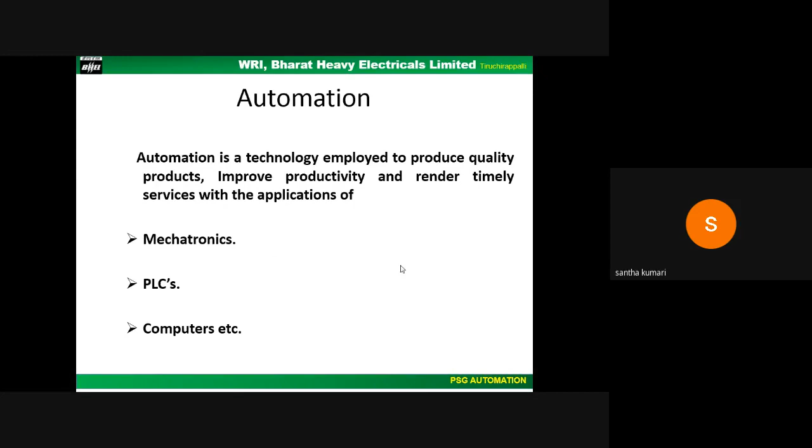My view about automation is that it is technology employed to produce quality products, improve productivity, and render timely services, with applications of mechatronics, PLCs, computers, including robots. This could be my view of automation's definition.

It's not possible to fully automate all functions every time, and complete automation is also not required for many production jobs. In such cases, we can choose automation stage-wise, by introducing simple automatic devices in an existing plant to save labor, increase input-output, reduce physical effort of the operator, achieve better quality of product, and ensure better productivity and profitability.

So here is an example. Am I audible, ma'am? Yes sir, yes, audible ma'am. Sometimes we have network issues, that's what I just checked. Okay, if so, see this image—if manual loading process is used, it's an example just to load, to deliver a box from one place to another.

If a manual loading process is employed to move a component or box, it may seem to be a laborious job. It needs more operators to do the job as depicted in the picture, and sometimes it also leads to operator fatigue.

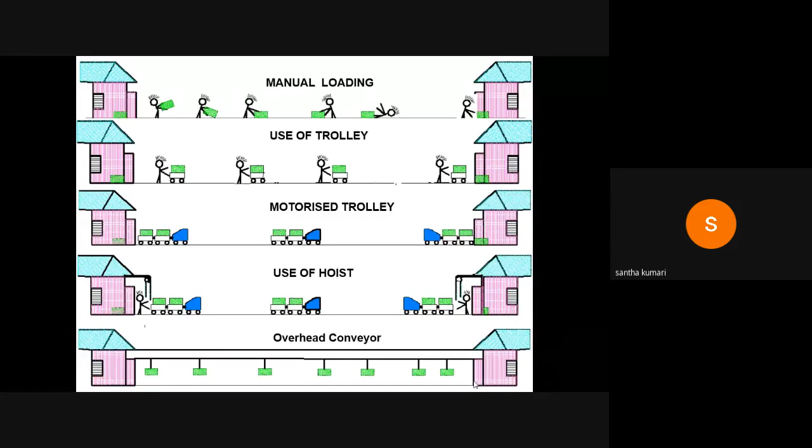This can be achieved by introducing very simple devices such as limit switches, electrical relays, solenoid valves, or pneumatic actuators—using simple devices with relatively cheaper and readily available components to minimize or eliminate human effort in certain operations.

Now coming to the concept of welding automation. Welding automation can be defined as a process by which a welding process hitherto done manually is automated partially or fully. This is achieved by controlling the welding parameters and the motion of the torch or the part to carry out controlled welding along the desired path.

This involves integration of welding controllers, drives, positioners, sensors, etc. The extent of automation possible decides whether we can have a semi-automatic process or a fully automatic process. A welding quality check may or may not be integrated for different levels of automation.

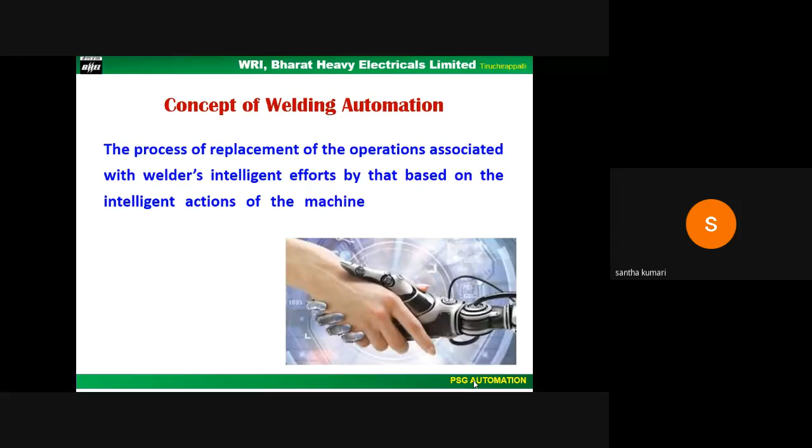Welding automation efforts are gaining momentum not only because of the scarcity of skilled welders, but also because it results in advantages of improved productivity since we can use higher welding speeds and currents, improved mechanical properties by minimized HAZ, continuous welds with fewer starts, stops, and defects, less distortion, and freedom from hazard and fatigue to the welders.

For example, in manual mode of GMAW, we can have a welding speed of 0.3 meter per minute with a welding current of 250 amps. Whereas in mechanized mode, the speed can go beyond 1 meter and the current can also go up by 2 times. And if we choose robotic welding, we can increase the speed even more.

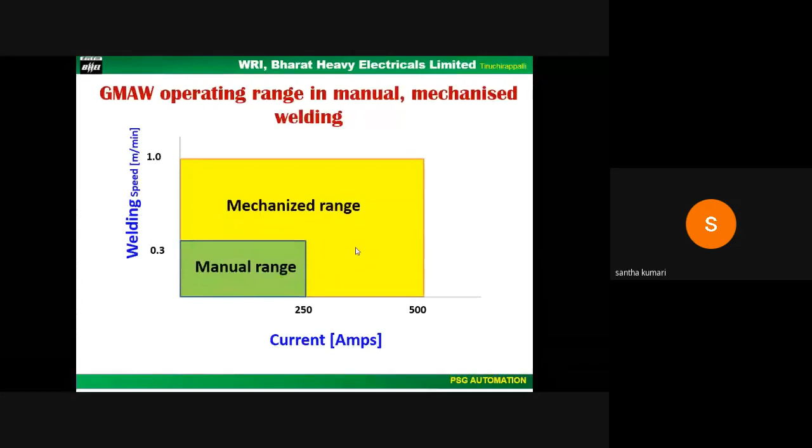To perform a quality weld, two types of functions are essential, categorized as physical functions and intelligent functions. Physical functions such as feeding the electrode, moving the arc along the joint, etc. come under physical functions. Intelligent functions include the programming and control functions.

Programming means setting proper welding parameters, sequence of welding operations, etc. And control functions include taking corrective action online during welding to achieve the desired results.

As per AWS A3.0 classification of automatic welding systems, a mechanized welding process is defined as one in which all the physical functions are performed by the machine and the welder performs the intelligent functions. In the automated mode, all or more intelligent functions are also taken care of by the machine along with the physical functions.

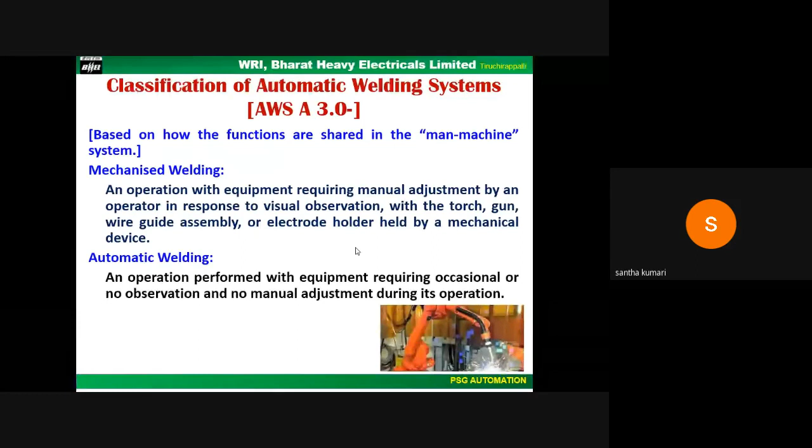This slide compares the performance of various functions in the manual, semi-automatic, mechanized, and automatic modes of welding. In manual mode, all the functions are performed by the welder, and in automatic mode, all functions are taken care of by the machine.

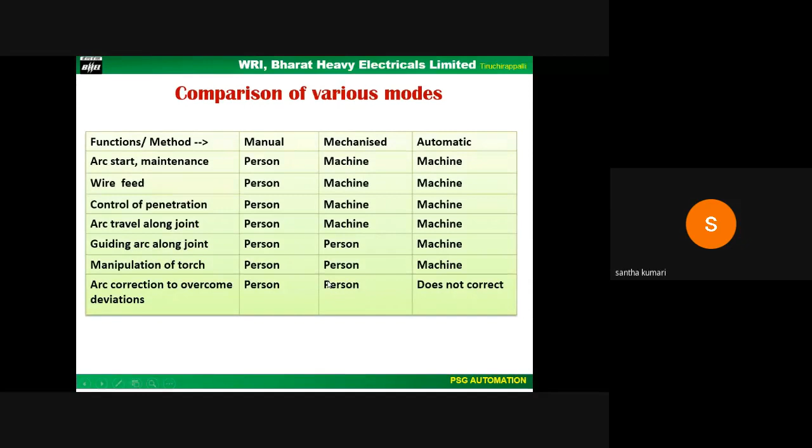In case of mechanized mode, the machine takes care of arc initiation, arc stability, wire feed, control of penetration, and arc travel along the joint. However, guiding arc along the joint, manipulation of the torch, and arc correction to overcome deviations are carried out by the welder.

The automation process requires all forms of parts, either circular, orbital, or longitudinal, and sometimes we may need to go along such seams, needed in overlaying or hardfacing. To take care of all these, we may have to plan seam control and in some cases weld sequencing also.

For successful implementation of such systems, we should develop effective control systems with seam tracking control of the welding line, adaptive control for welding conditions, and welding monitoring. The sensors play a vital role in the development of the control systems mentioned here.

Hope these might have been covered by Dr. P.R. Venkateswaran in detail yesterday, so I'm skipping the details about sensors and controllers.

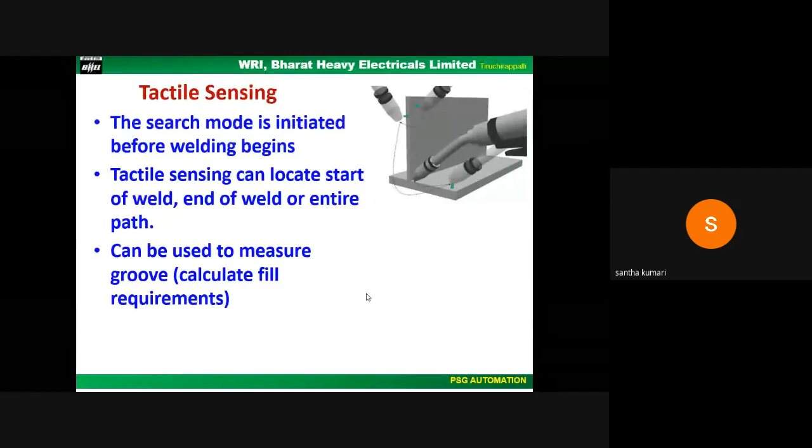Coming to the arc welding processes which can be automated: GTAW (gas tungsten arc welding), gas metal arc welding, submerged arc welding, plasma arc welding, and flux core arc welding are the candidate fusion welding processes. Besides these, beam welding processes like laser and electron beam, resistance welding, hybrid processes, and solid state welding processes could also be automated.

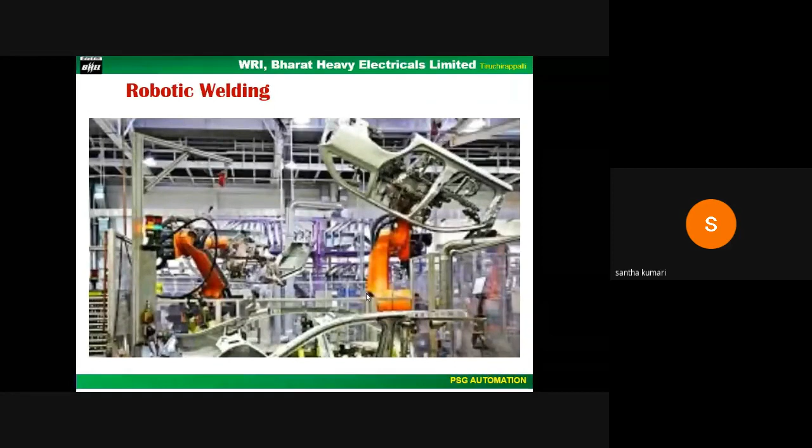That means one car has to be produced in 1 minute. Otherwise, think of what could be the loss considering the production time delay. So robotic welding offers a number of advantages, which you might have heard from many faculties.

Increase in productivity can be achieved by enabling greater work time and moving quickly between weld joint positions. Consistency and repeatability can be achieved by performing precisely the same weld cycle continuously. Flexibility: we can save valuable time and eliminate tool changes, as grippers can grab any part regardless of size or shape, position it on the assembly, and hold it tight during the welding process.

Safety is reducing the number of accidents to workers in the metal fabrication industries by means of robotic welding. Quality: superior quality can be achieved by ensuring the correct welding angle, speed, and distance with repeatability and accuracy. On the labor side, we can alleviate issues in busy times by reducing additional labor hours and the need to hire and train extra staff. All this can be eliminated.

Reduced consumables: programs can be set to always weld to the correct length and size for the joint requirement, thus reducing consumable usage. Production cost can be reduced by saving on energy consumption and consumable cost, in addition to lowering workers' compensation and insurance cost.

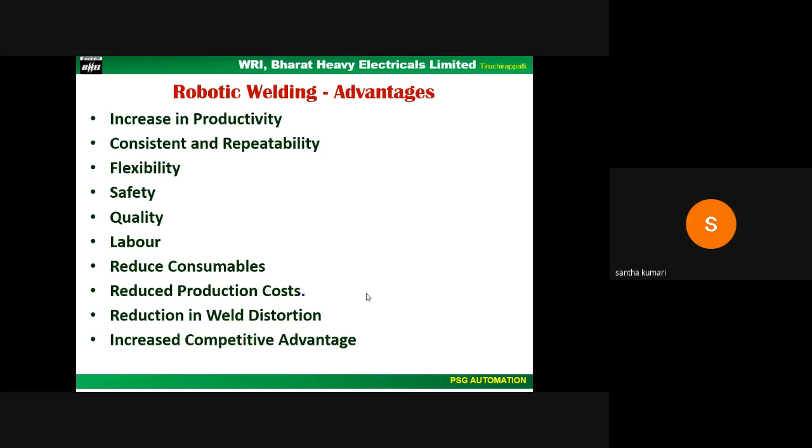So overall, we can say that a robotic welding system should have the capability to track the seam points and start points, with online course correction, to produce quality welds.

Now I am going to show some slides about a few successful implementations carried out by BHEL, which will be discussed in the forthcoming slides. I think it will be of interest to you also.

This is for tubular joints. The automation has been done at BHEL. Since it is a power component production, we cannot have robots in all functions of its production. So from low cost automation up to the robotic level, we tried to automate the functions of boiler component production. I'm just mentioning a few functions that have been automated, from lower cost to high cost.

Actually, this can also be considered high cost because many levels of automation are involved here. The automation has been done for feeding jobs to the welding machine using a waterfall rack. The tube is automatically fed into the machine, and after welding, the system feeds out the welded tube to the real-time radiography room. The straight tube butt welders with waterfall rack tubing in-feed and out-feed systems are the workhorses of a company like BHEL.

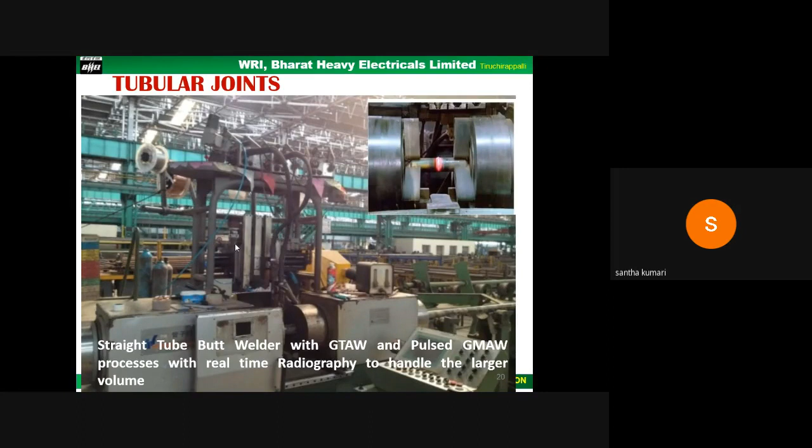This produces a few lakhs of weld joints every year, and automation is done to the level of producing the weld joint for real-time radiography testing at the control room along with the production line, all in real time. After welding, for sending the tubes to the room, we use motorized systems. So this high level of automation has been done in the production of tubular joints.

Another automated system is the 20-torch panel processing machine, using the solid wire GMAW process with argon and CO2 as shielding gases to form the panels. Welding is carried out on both sides simultaneously using the 20-torch machine: 10 torches are organized at the bottom for overhead welding, and 10 at the top in downhand position, without distortion, all handled by the automated control.

So a typical 500 megawatt panel has 2.5 kilometers of weld fillets on both sides. Speedier welding, spatter-free control, reduced distortion, and very low defect levels have been achieved with this kind of automated system at BHEL.

During the panel welding, sometimes we have issues, as this 20-torch machine continuously welds 2.5 kilometers of fillet weld. So sometimes skip welds will occur.

Hence, a carriage-mounted welding system that moves on the panel has been developed for repairing skips and also for joining mini panels, by which we were able to save operation cost. Otherwise, we used to run the 20-torch machine to load for welding the mini panels, for that single line of welding. So this system has been developed and is being used successfully.

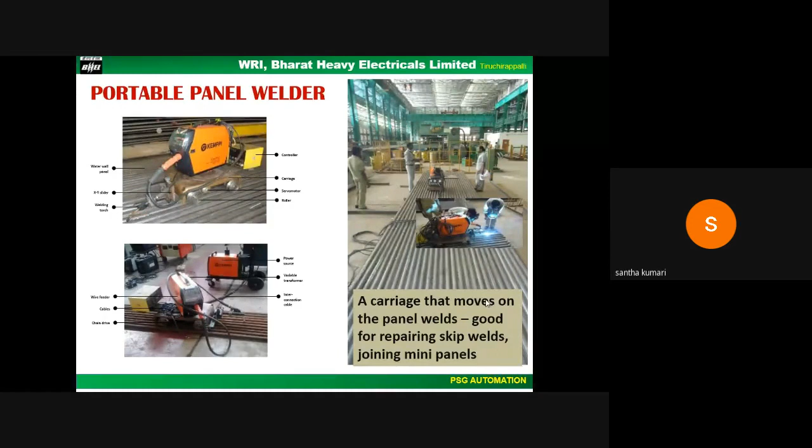This is a programmable orbital gas tungsten arc welding system with a tailor-made tube edge preparation and joint fit-up equipment, all integrated into a single station, suspended from a movable gantry, resulting in high productivity and lesser operator fatigue in making joints in 5G position.

So this is another automated system developed with the help of Primo automations. Bifurcates are used in 500 megawatt boilers wherein a U-tube and a third leg, lengthier tube with bends, will be joined together at the bottom of the U-tube. This was earlier done by manual GTAW process.

The edge preparation on the tube will be made through a pull-out system, and making a defect-free weld was really challenging. By developing a mechanized system, welds were made successfully with GTAW root pass and filler passes with GMAW.

Since the tubes have deviations in all three axes, aligning them in the joint area was achieved by making a flat bed. By implementing this system, the productivity increased to

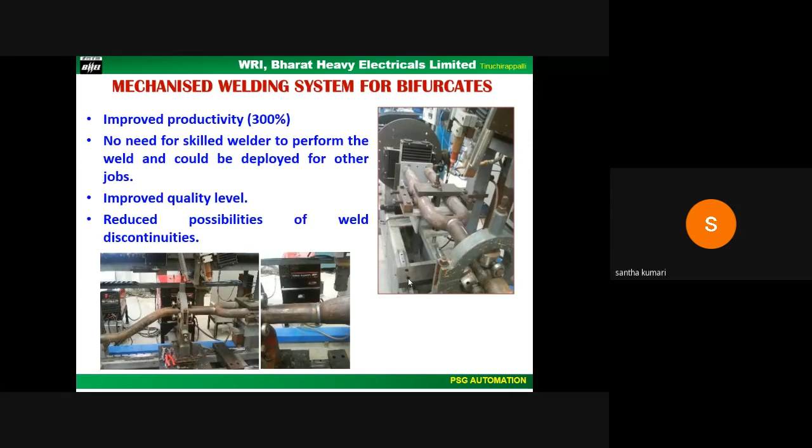300%. This is another automation: welding of hand-hole pipe with a dished end. Ends was another challenge as the weld should meet 100% RT quality as per ASME, and subjected to proof testing by hydrostatic test at shop.

A mechanized welding fixture had been developed to make the root pass by STT waveform control process, because here we have gone fully GMAW. Earlier it was done by TIG welding for root pass and further process by manual GTAW, GMAW or SMAW. But by developing this and through automation, we brought in waveform control processes, and a fully GMAW process had been developed. This has replaced the manual GTAW and SMAW process and increased quality and productivity.

We could achieve 600% increase in productivity by this mechanization. These are systems that have been developed worldwide by a number of power source system manufacturers.

The automated orbital hot wire TIG welding for pipe welding can be used for site applications. It is a portable system. We can take it to site, and we have used this for our site implementations for pipe welding, for repair, and also for welding works.

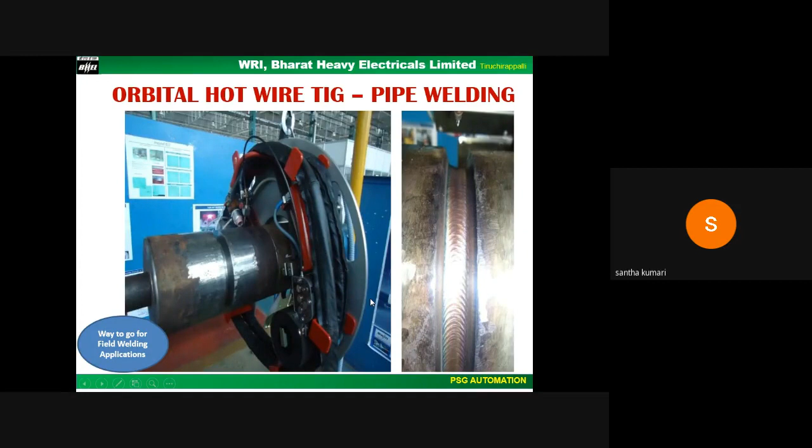This is another successful establishment of mechanized welding procedure for reactor header subassembly for nuclear steam generators, a significant development made in the recent past. The weld should meet 100% radiography and 100% ultrasonic test, and the weld root penetration should be less than 0.5 mm. With the manual SMAW process, rejections were over 25%.

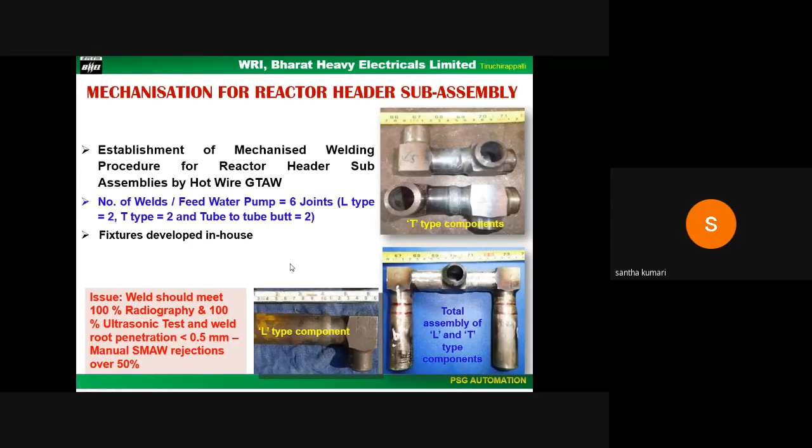Earlier, they were also using inserts for root pass. Now, with this automation, the necessity to use the insert for root pass has been eliminated. What we developed here is special fixtures to hold the jobs in the orbital hot wire tube butt welding machine. These in-house developed fixtures helped us achieve a flawless, defect-free weld. Less than 1% defects were obtained through this automation.

WRI is also working with OEMs to develop boiler panels. In shop we use this 20-torch machine for doing panels, but in site applications, panel welding is really a challenge because of the distortion and the height of the panels.

It will be in a vertical position. We have to do the groove weld or fillet weld, that is the tube-to-fin weld. To replace this low-productive SMAW process, this technology was developed, bridging the non-uniform gap between the joining faces, which is a major challenge in developing this technology.

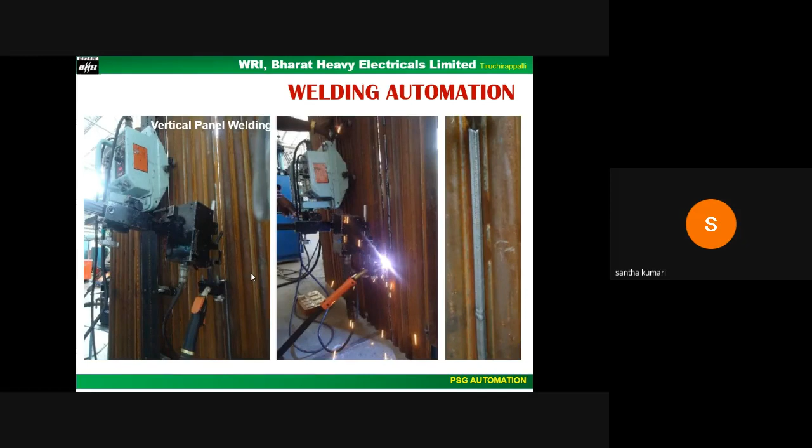We also work on low-cost automation for thin-walled pipe welding in 5G position to enhance productivity and quality. This is another development.

An elbow, like this, and the tube has to be welded with the elbow. By joining this, it was a site joint earlier and it had been given to the shop factory to do this as a shop joint. They were using the manual GTAW process, with a skilled welder. For him, it took time to make a quality joint.

Mostly, 5 weld joints used to be made per shift by a skilled welder. With the mechanized way of gas tungsten arc welding, including hot wire addition, we were able to increase production to 20 weld joints per shift, and rework could be reduced to less than 1%. Even so, one operator will be sufficient, so the skilled welder can be deployed for other welding requirements.

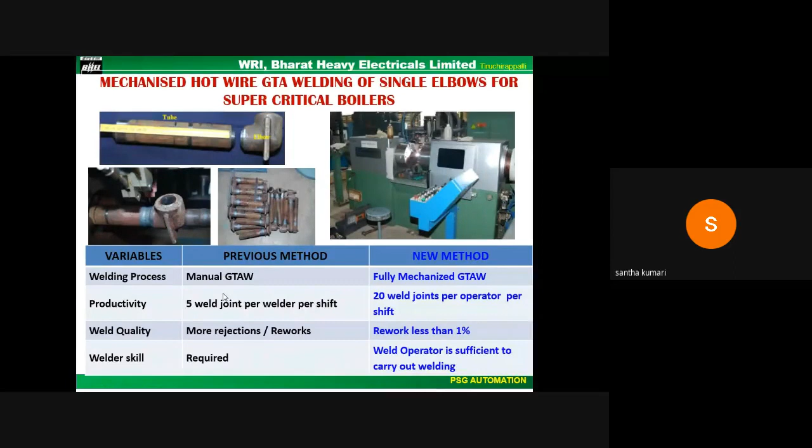Earlier, a GTAW welder - ma'am, is there any issue? Am I audible, sir? I think someone has put their mic on. Yes, you are audible. Okay, yes sir. Okay ma'am.

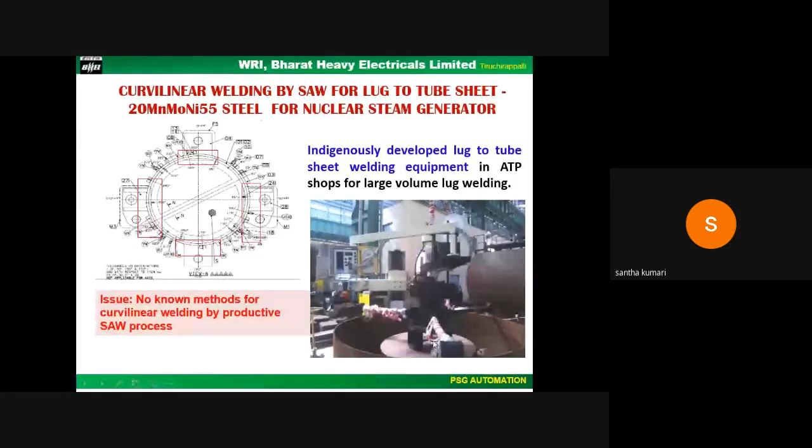For larger volume of lug plate welding for nuclear steam generators, a SAW equipment with a laser vision system was developed indigenously, where there was no known method for making curvilinear welding by productive SAW process. Implementation of the system in place of manual welding increased productivity to a level of 300%, with lesser defect rate.

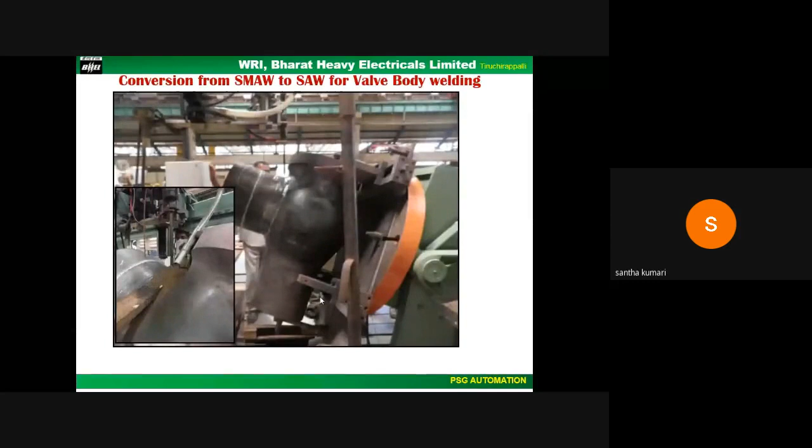This is about the development of a mechanized submerged arc welding process for fabrication of HP/LP valve components in place of SMAW process, bringing down the cycle time from 16 man-days to 3 man-days. Now you may appreciate the level of automation. Without robots, we are able to achieve a higher level of automation with other tools like PLCs, positioners, and so on.

This is another recent development - an innovative application of hard facing using flux cored arc welding process with alloys in wire form incorporated directly into the weld. The Stellite 6 alloy was used on the valve disc. This is a valve disc component - it's a 9 series. The valve discs are also available in chromoly steel material.

Good wear resistance can be obtained due to the characteristics of chromium carbide dispersed in a matrix alloy that is deposited. These results showed pore-free, that is porosity-free, coating without surface oxidation, and the required dilution was achieved with this process.

We used the STT process - it was well suited for this application. It required nearly 25 passes per layer to complete the cladding by manual TIG process, whereas with this flux cored wire, we used only 6 passes with a minimum of only 2 layers.

With controlled weaving, we achieved the desired quality. It was also tested and took nearly a shift to complete. For manual metal arc welding, it required two and a half shifts to complete the welding.

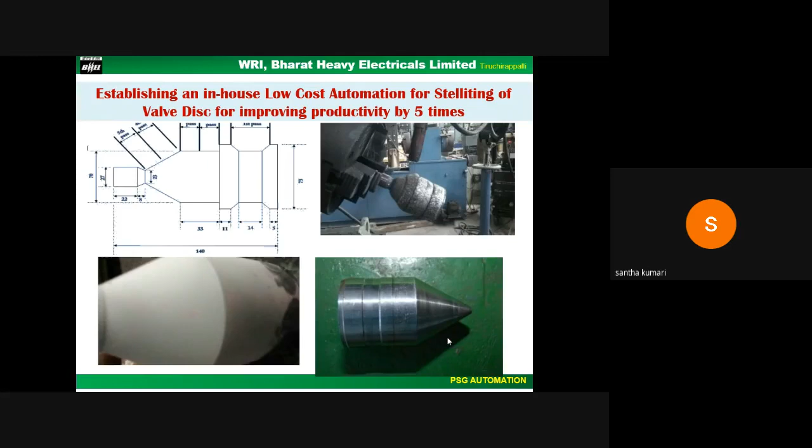But with automation using the positioner - you can see here the positioner and the XY cross slide with controller - and continuous feed wire by the FCAW process, we were able to complete it in 2 hours, including the interpass time. Another major advantage achieved by this overlaying method was that we were able to avoid the intermediate heat treatment cycle in case of P91 material.

This is again friction stir welding. Friction stir welding can be done even with a vertical milling machine, but we have a dedicated friction stir welding machine at our Rudrapur unit. There, the product is a bus duct component for boiler application.

A fixture was needed - fixture and tool development is a major application required for this friction stir welding component. So to automate this welding, we had to develop the fixture and tool to guide the CNC for continuous friction stir welding of an octagonal aluminum bus duct component, which reduced the welding time, and it also got qualified in UT.

So this level of automation had gone through in our boiler components. Now, robotic automation will be challenging for pressure components because they are high pressure components - it will be a challenge, but anyhow, we are also using robots in our shops.

This is an example: a CNC gantry robotic welding system integrated with gas metal arc welding for fabrication of sub-assemblies of a transformer tank.

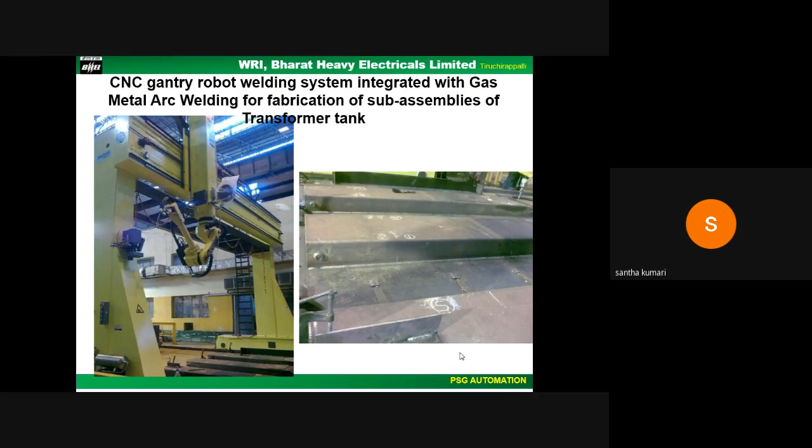With this system, transformer tank subassemblies are being welded, and because of this the weld processing time of the components was reduced by 60%. The necessity for back chipping, dye penetrant test, and second side welding have been eliminated by developing parameters for full penetration joints from a single side.

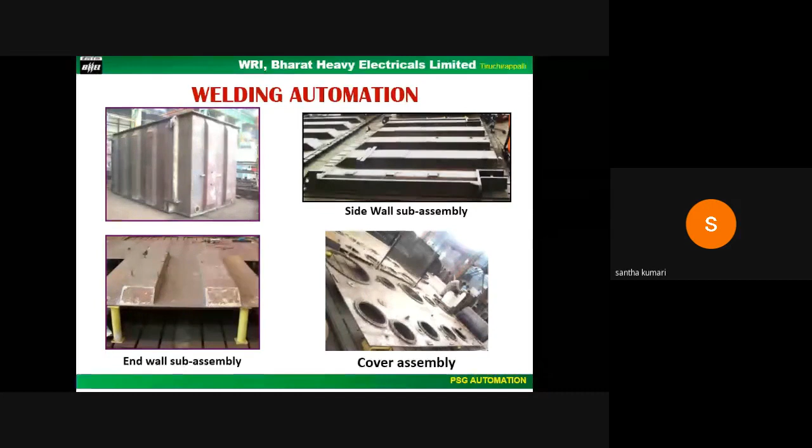You can also see some more pictures of this. This is another one, I have a video, but it's not running here.

I'll just skip this. There is capacitor box welding by robo with a laser hybrid welding system that had been developed at BHEL Bhopal. This robo has also been used for repair welding of valve bodies, that is, machining and building up of material. We are now talking about 3D printing, all these things.

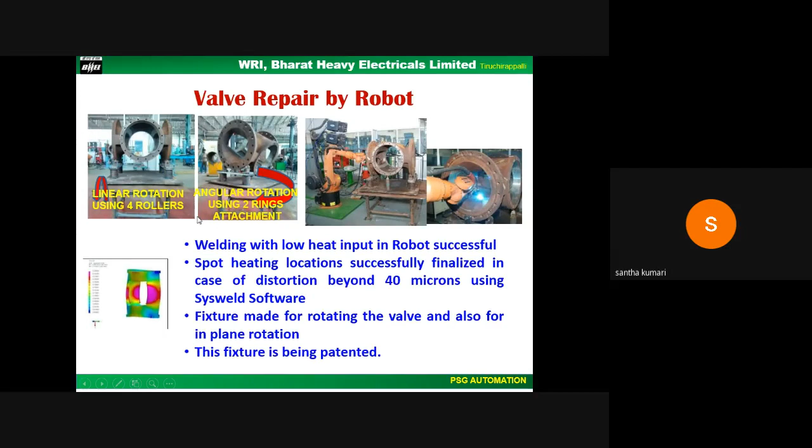We used our robo with CMT power sources because we needed a low heat input process for repair of this valve body component. A special fixture was developed for positioning the valve body to integrate it with the robo. We were able to do this repair welding with robo using this CMT process.

This is another robotic welding for the valve body yoke component. Here we used two robots, one to pick up the component and fix it for welding, and another robot for welding done by the GMAW process.

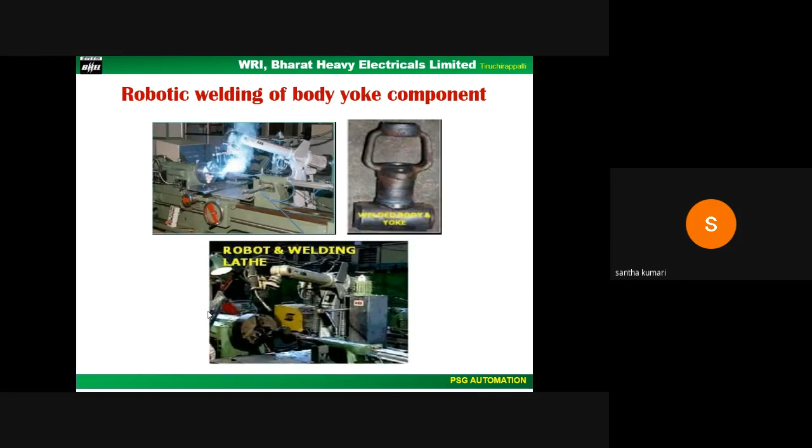There are many applications we tried, not only for the power sector but also for the automotive sector, and an LPG cylinder also had been tried out for weldability of LPG material. We tried with the tandem twin process, and the HRSG module welding for power products was tried with automated robo systems using the tandem twin process. I already mentioned truck wheel welding by tandem GMAW process was tried out as well.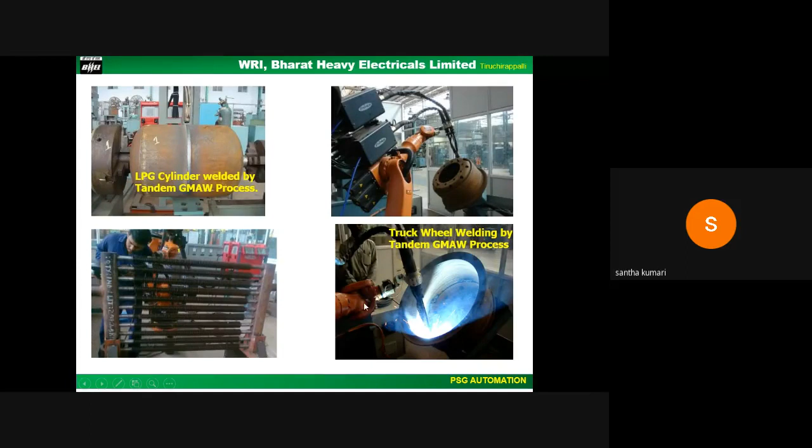This is another interesting application which we developed through automation. A special system, WRI, was developed to achieve full penetration in header-to-stub or pipe-to-tube applications. Normally, the stub on the header is welded using the SMAW process. For nickel alloy welding, to achieve deeper penetration to weld at high peak places, there was a design requirement to achieve this deep penetration.

It is not a full penetration but a deep penetration, so a special system had to be designed because it has to be done by the GTAW process. We had to fabricate for the root pass; inside the joint configuration the stub is placed, and full penetration was achieved by the conventional TIG welding process. A special purging setup was also developed and fabricated for this welding.

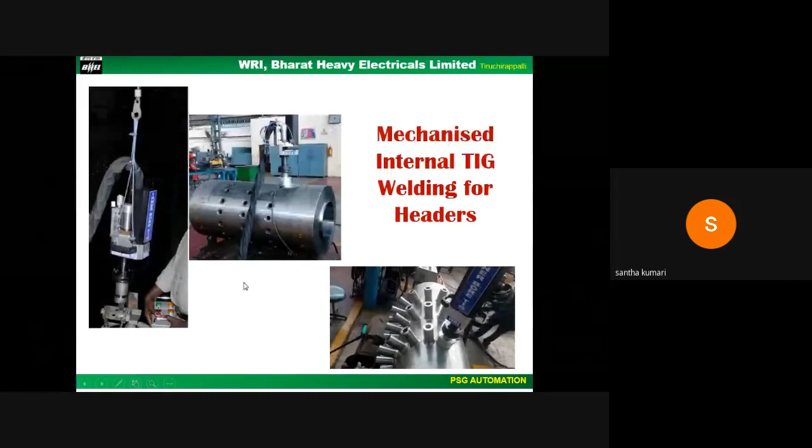So this is another one—in the previous slide I showed you automation by TIG welding as an internal fusion process. This may be very interesting to you: a special automated system is now available for header-to-stub or pipe-to-tube applications.

This system has been developed by an Indian manufacturer, and we are going to purchase this. By considering the pitch of the two adjacent stubs, this fixture development had to be considered.

So this kind of weld is being carried out by manual SMAW process, as I said earlier, with different sizes of electrodes: for the root pass a 2.5 mm electrode, then for further passes higher 3.15 or 4 mm electrodes were used. The number of starts and stops, the slag removal, and the dye penetrant test in each layer were the limitations in manual SMAW, which could be eliminated by this kind of system.

You can see manual welding as well as the automated welding. We were able to get a full penetration weld here with this system. A demonstration had been done by the system manufacturer.

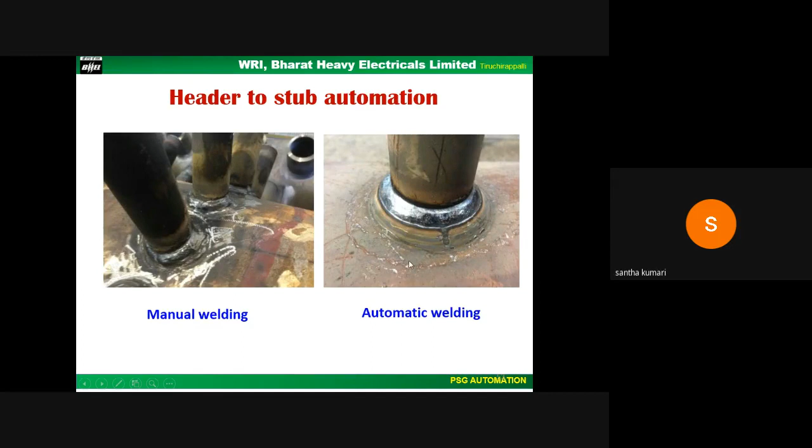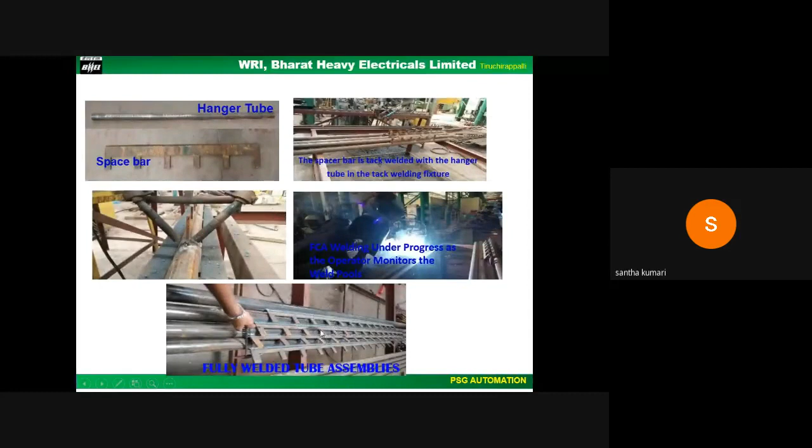Besides the increased productivity of 300% and reduced cycle time, you will see the welded product of the hanger tube of 2 to 3 meter length. This had been done at our Unit 2, where Mr. Rajshekhran sir is working. He is the leader of this project, and his team was involved in making this automated development.

This same technology - you can see here the manual welding and GMAW, FCAW processes we use - had been adopted for carrier plate welding of boiler production. Even for P91 material, we tried this technology and successfully developed it.

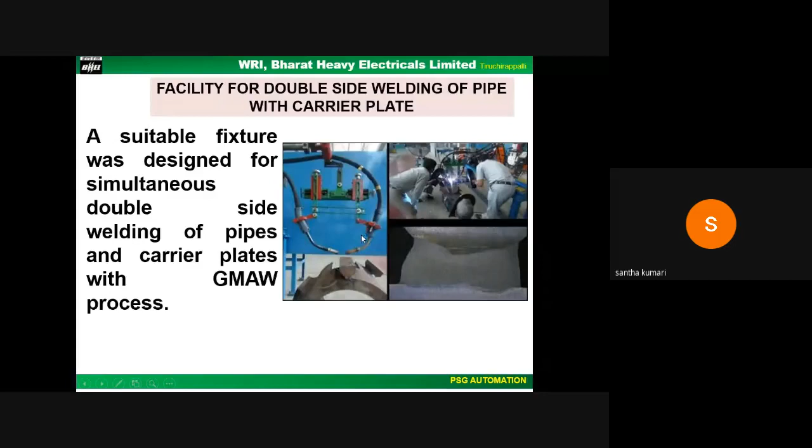It's a valve gate. Here we can see the mechanized systems we have for welding of high thick plate pipe, as well as narrow groove joint - the hot wire narrow gap systems with the column and boom structure - as well as orbital welding systems which can be used in site applications as well. These applications take care of our pipe production, including newer materials like nickel alloys. WRI is working with AUSC material, so all AUSC material pipe and tube weldings had been done with these kinds of systems.

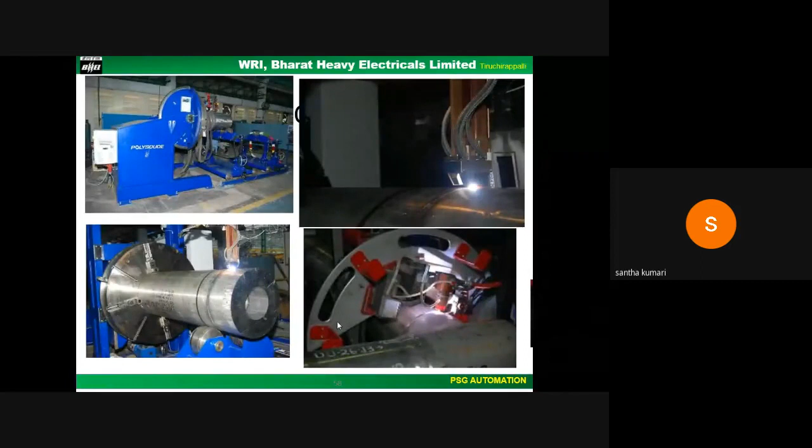These systems have a weld monitoring provision also. By viewing the weld pool and the filler material melting through camera, we will be able to align the torch to the groove. This is another robotic system available for cladding of valve components - you can see here valve components for internal or external cladding. There is also automated pipe cutting available now in our shops, including chamfering along with pipe edge preparation.

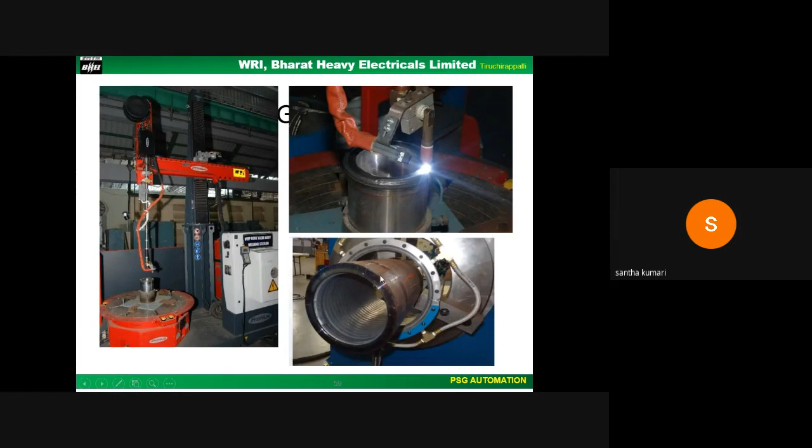We also tried feasibility of trial 3D printing for turbine blade components. To summarize this first part: there are plenty of systems available for automating any process. We can develop our own tailor-made systems to suit our requirements, and we can think of adapting cost-effective automation techniques to suit our products. I hope you will agree that automated welding can provide large gains in productivity and profitability in the right applications.

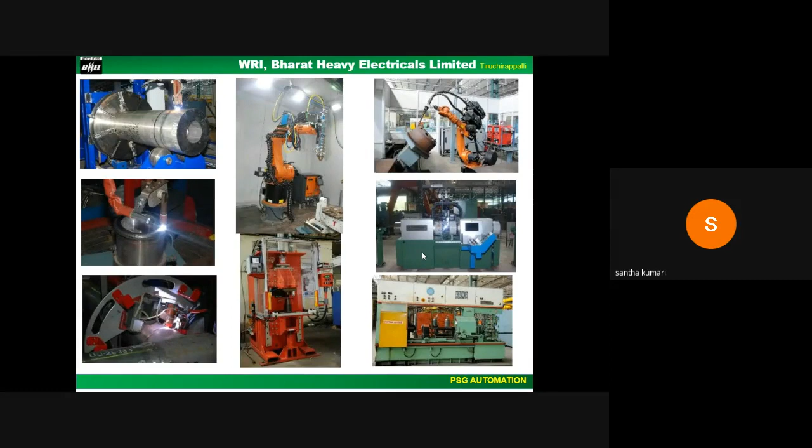Now coming to the second part of my presentation, on the role of digital technologies in welding applications. What is digital welding? It can include chipsets and small pre-programmed circuits, but the term digital, when referring to a welder, does not mean that it is a digital machine. Digital in welder means that almost all the basic controls of the machine are managed by a microprocessor, the chips.

What is inspiring in the welding industry today is that welding has been primarily associated with mechanical engineering. Interestingly, when we look at welding machine manufacturers a little closely, you will find that they are engaged in electrical and electronic manufacturing.

This brings in a fundamental change in the way we look at the industry. When it is controlled in terms of electronics, it becomes a combination of hardware and software. While the development in the hardware side has been growing, the software side also has grown leaps and bounds along with the digitalization. The foremost technology out of the top 10 technologies today is IIoT, 3D printing, additive manufacturing.

Today, companies bring in total quality welding quality management systems through IIoT covering the welding documentation and the quality requirements for welding procedures. It also enables full traceability of welding activities before, during, and after welding. As additive manufacturing and IIoT are being covered by experts during this 5 day program, I will cover only

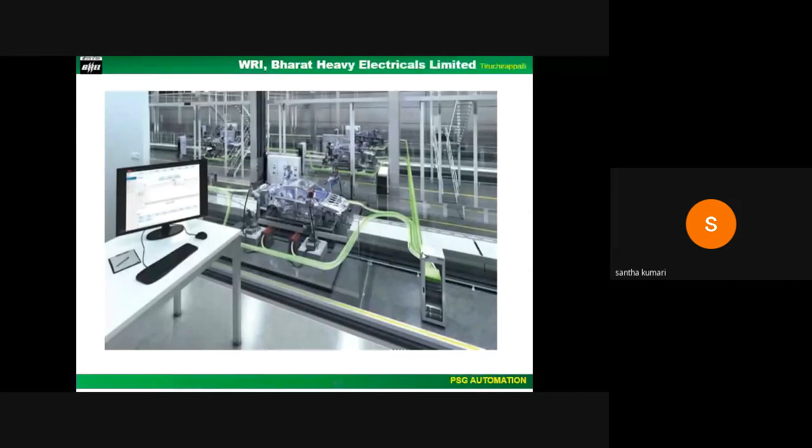The trend of digitalization known as Industry 4.0, in which big data plays a crucial role. The big data usage was primarily driven by the big internet players such as Google, Amazon, Facebook, or Twitter. The enormous success of these internet giants illustrates just how valuable the resource of data is today, by storing and processing it.

When a trainee welder sits in the welding booth after getting trained in this booth for the first time, they could feel themselves, they could know pretty well whatever they need to look for, giving the ability to familiarize people with no practical experience. They get trained in an environment without risk of welding flash or extreme heat.

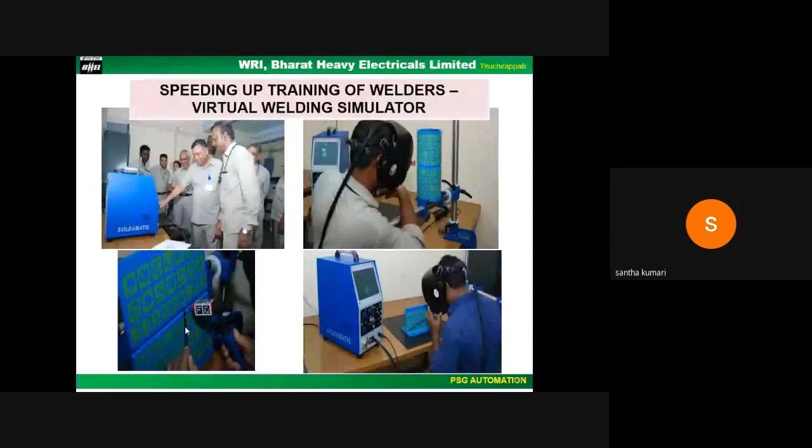We have SMAW, GMAW, even including GTAW, and all positions - vertical, horizontal, and even 5G position - a welder can get trained in all these things with this tool. It is a tool for welders to evaluate themselves before going for practical welding.

Nowadays, electronics and digital technology integrated chips have made welding power sources compatible with any robot. Even Dr. Suresh had mentioned this. I joined the earlier session for a few minutes, after that the line got cut.

There was a network problem. It can be ensured that the weld quality is good, there is no rework or rejection. The welds are spatter-free and entail high quality, ensuring better control on arc and position of the torch, so that we get a perfect weld without depending on the welder's skill. These integrated digital systems in welding power sources help achieve uniform penetration and control the heat input so that deformation is minimal and the weld bead is beautiful, giving the desired shape.

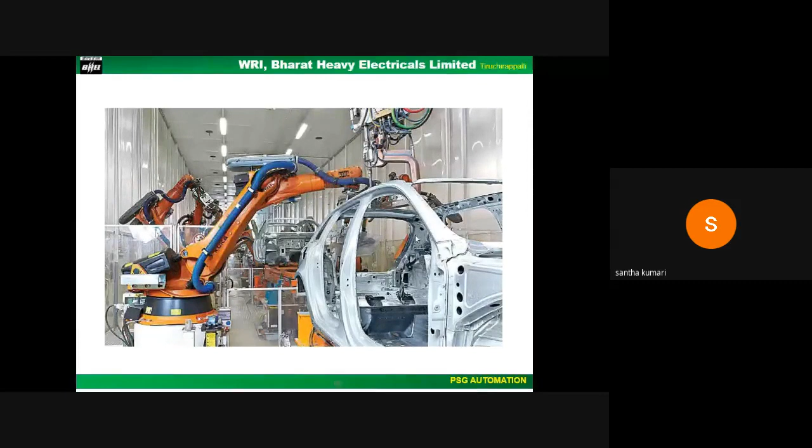that has been done by WRI using digital techniques for power source evaluation, optimization of process parameters, welding consumable evaluation, and quality management. If time permits, I will go into detail, otherwise I will give an overview about these things: power source evaluation, consumable evaluation, and quality improvement.

The properties of power supplies can be defined by their static and dynamic characteristics. The static characteristics, which are the correlation between output voltage and current for variable loads, determine the power source suitability. The dynamic characteristics, which are welding voltage and current or current waveform recordings caused by the metal transfer across welding parameters and electrical parameters of the power source, such as resistance, capacitance, and inductance, determine the stability of the welding process.

The static characteristics of the power sources can be easily verified at the user's premises or vendor side, for ensuring specification as well as calibration. With a simple load test, the static output characteristics of the power source can be tested, but the performance of the power source, mainly the dynamic characteristics, should be tested at the user end and also to ensure the claims of the suppliers, since it will affect the process capability.

We can say the waveform of short circuit current itself is a result of dynamic properties of the welding electrical circuitry, which are the first to get affected by the power source properties. For example, the rate of rise of current affects the metal transfer, and the peak level of the short circuit current influences the amount of spatter and its nature.

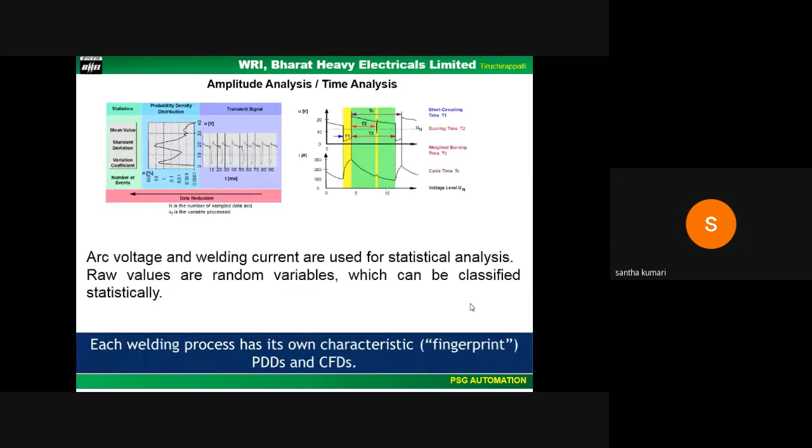The measurement system can include data acquisition with sensors for current and voltage. Dr. TRV would have told you about the Hall effect sensor - it would be the best one for measurement of such welding systems.

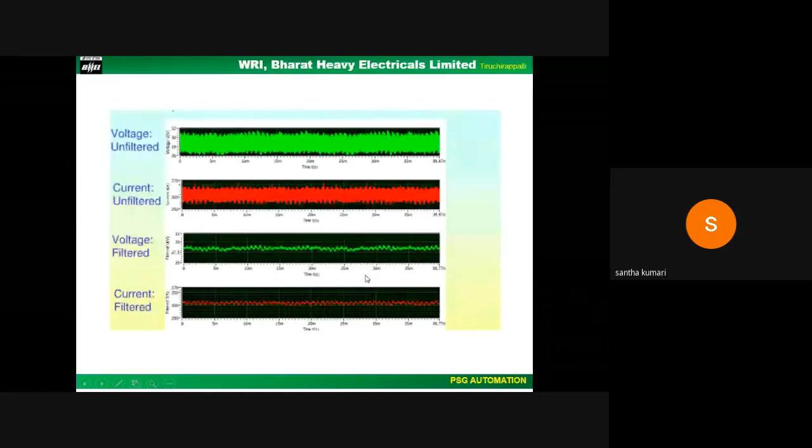This is another power source we tested at our lab. Again, consider the normal conventional modes of metal transfer in GMAW process - I say modes of metal transfer because GMAW power sources have been developed in multi-fold ways, as Dr. Suresh sir would have mentioned in his lecture.

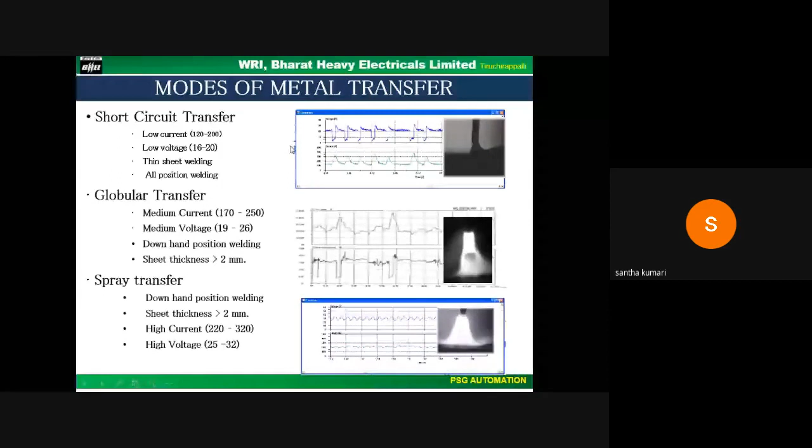Several of the world-renowned welding equipment manufacturers have come up with a variety of waveform control power sources with their trademark technologies suitable for welding applications. Among these conventional power sources, it is not possible to lower the current in the short circuit mode of metal transfer, which is being used for thin sheet welding, root pass welding, and gap bridging. So we also tried one of these power sources for automated steel.

We were able to get good seam welding, lap joining. So we can also say that this kind of GMAW power sources can replace the seam robot, that is resistance seam welding. With conventional power sources it was not possible to lower the current in the short time necessary, as it does not permit the rapid control of current due to the mass of the transformer and the downstream choke.

The case is different with inverter power sources, because here the inductivity can be set electronically and can, in the event of a short circuit, be even fully shut down, which means that only the inductivity in the welding leads remains active. So the rise and fall of the current during the short circuit phase and the reignition of the arc can therefore be fully stabilized very quickly, with lesser and even no spatter.

So you can see here the conventional short circuit: the ramp up at the base current, from the base current the ramp up, and the droplet forms and gets dropped on the weld pool, and then it continues again.

Whereas in the new waveform control power sources, they reduce the current initially to avoid premature droplet formation, and also reduce the current again before the droplet transfer to avoid spatter.

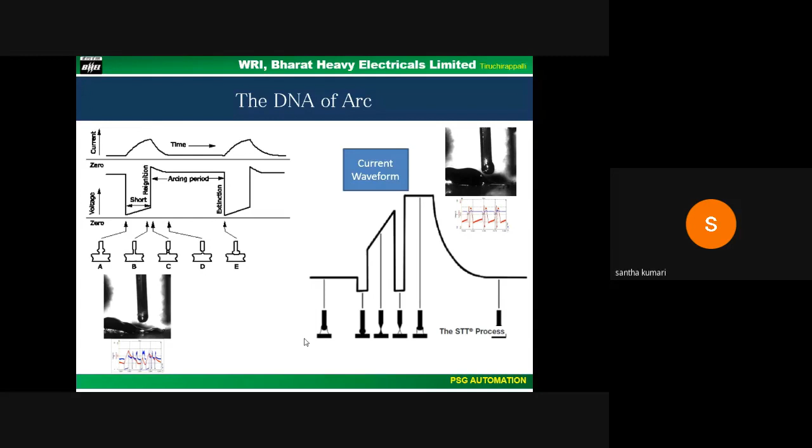A power source had been studied for root pass application for pipe welding, and the same was used for root pass welding of pipe, and further processed with flux core arc welding process to achieve a very good weld of 32 thick pipe for site applications. We used one of these waveform controlled power sources.

Here another power source had been studied called STT. I think we have used this already - I have discussed this in my earlier automation section, development of fixture for hand hole pipe. For this we used the STT power source here.

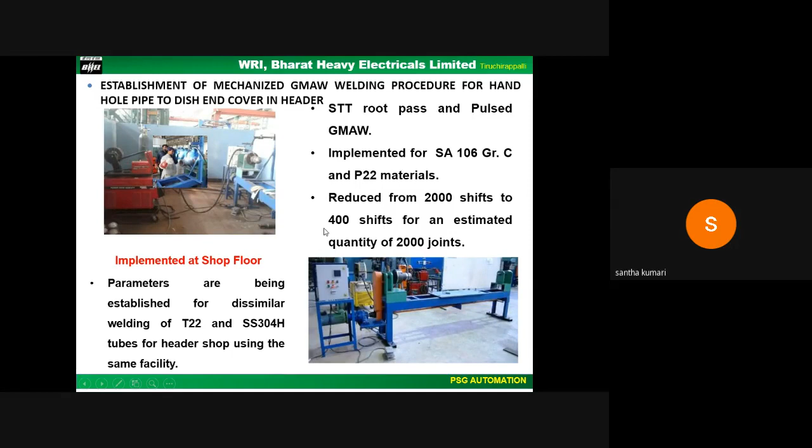We also use this kind of waveform control power sources for replacing resistance seam welding and also gap bridging, which could be more useful in automotive applications, automobiles.

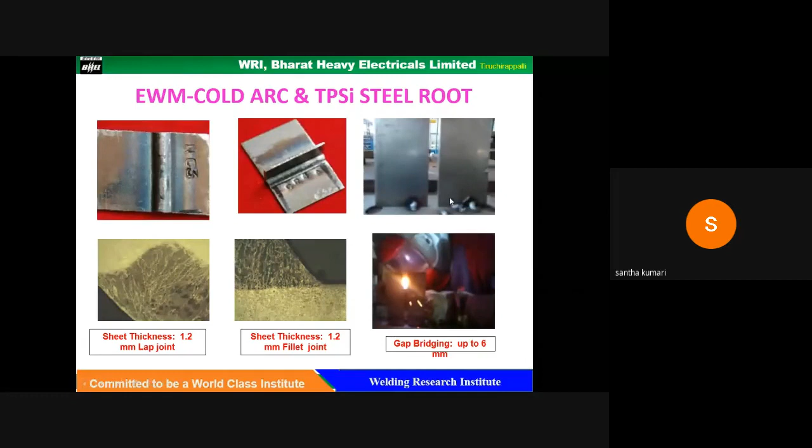So it can be used for dissimilar material welding also, because earlier for dissimilar welding we were using only the GTAW process, but with the advent of waveform controlled technique, we could weld dissimilar material joining by this kind of CMT process. It is also better for aluminum to steel - even coated steel can be welded by this process. That's how it can also replace the resistance seam welding process in automobile applications.

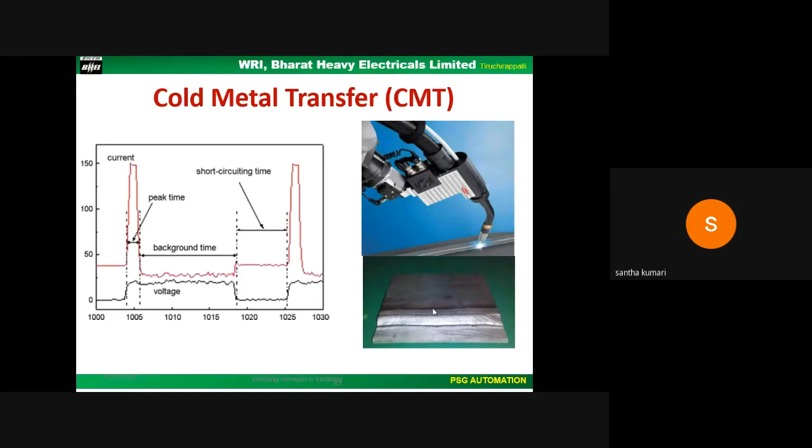This slide shows the integration of such power sources. You can see here a robotic Fronius stick welding setup and a Fronius CMT power source being used in a robot line for automotive applications.

Now we'll see how data acquisition can be used for welding consumable evaluation. As everyone is aware, solid wire and flux core wire or metal core wire are being used to continuously feed the wire to the weld pool in the GMAW process.

The major problems in FCAW are inhomogeneity of the flux and issues related to wire feeding instability. These are the two major issues while producing the flux core wire. Among these, the inhomogeneity of the flux distribution sometimes affects the process stability of welding.

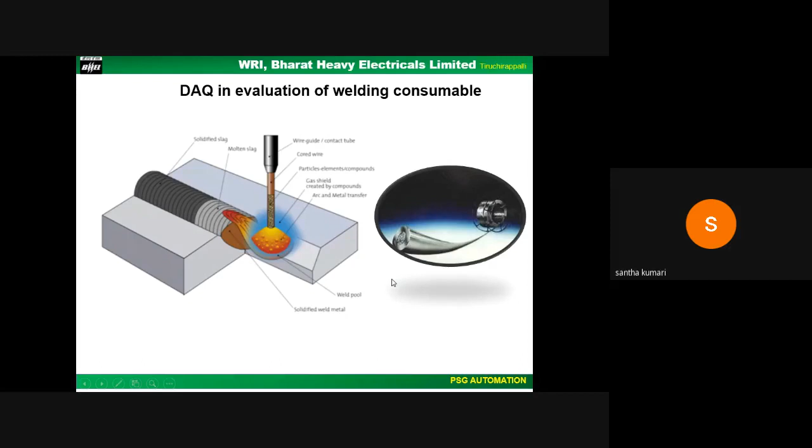The existing methods of assessing the quality of flux core wire by filling coefficient, by weight, or by wire length are actually lacking in sensitivity to the heterogeneity in different parts of the wire core flux. This has led to the task of developing methods of assessing the homogeneity of the wire core flux.

Here we tried two different flux samples, the same flux from two different suppliers, and evaluated them by the conventional method of wire length and cross-sectional area. We found that the average flux occupied area of the second sample was higher than that of the first one.

So this inhomogeneity can be studied and obtained by using our data acquisition system, including the Analysator Hannover. We used Analysator Hannover for this testing of flux core wire, using the arc welding quality analysis system. Two different flux core wires of 81 T1 type have been considered.

On analysis, it was found that for this flux filled area characteristic study, fully mechanized welding trials were carried out with a robo controller in 1G position on 20mm thick common low carbon steel plates, using a power source in constant voltage mode with continuous monitoring of welding current and voltage. There were significant differences in the statistical values, such as the mean welding voltage on the arc.

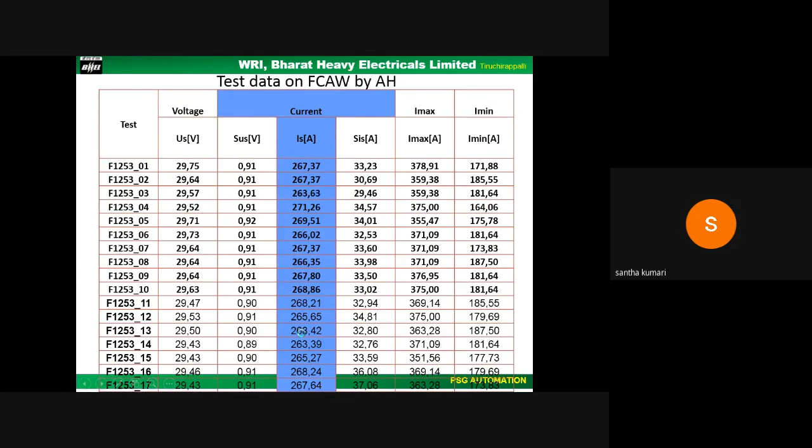You can see the current of the first set of wire and the current of the second set of wire had increased. This also shows that the second set of wire had an increased average occupied flux area, which could be evaluated digitally using the data acquisition system. The standard deviation of welding current and span values of I max and I min for the two types of wires are shown here.

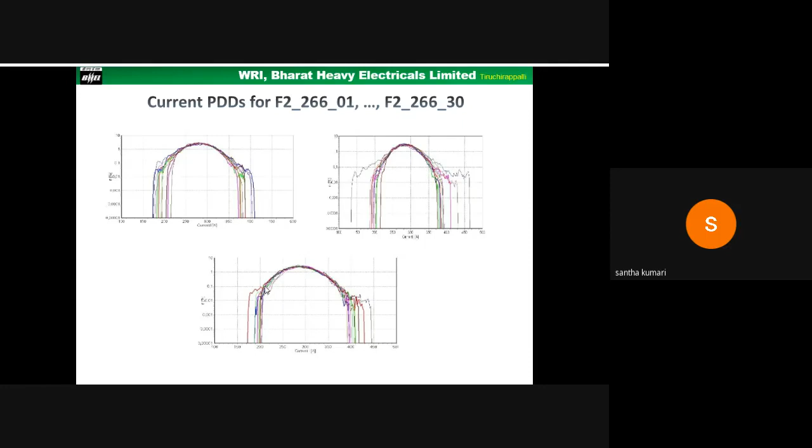In this way, we can use digital electronics data acquisition systems for analyzing welding consumables. Here is another work which had been carried out at WRI in real-time defect detection. This was another trial done for solid electrodes.

Electrode testing and evaluation had been carried out for two electrodes, one imported and the other from our own electrode development area. Mr. CPR had developed an electrode, so we were able to evaluate our electrode for further development, using Analysator Hannover for electrode development also.

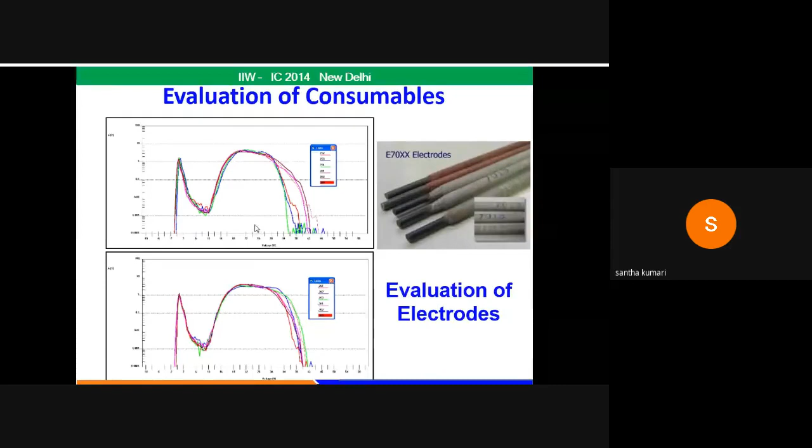This is another interesting work carried out at WRI in real-time defect detection using digital system data analysis. Pulsed GMAW process is employed as a productive process for manufacturing boiler pressure parts. Though the defect level is not more than 2%, the occurrence of defects hampers production and productivity, with the objective to establish a correlation between input variables and welding quality.

Through the arc signature analysis, this work has been carried out.

Though the process of welding can be automated, controlling the process to identify and eliminate defects still remains a challenge. NDT techniques such as radiography and ultrasonic testing offer only post-weld inspection, which adds to the cost and increases the cycle time.

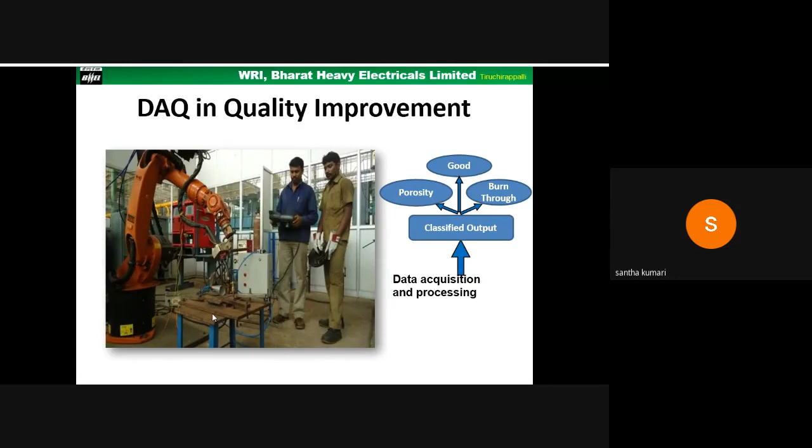This necessitates the need for developing a system for monitoring the welding process to identify defects in real time, so as to control or eliminate them completely before further levels of production continue. Researchers have adopted several techniques in the area of welding automation.

For the welding setup, we can use different signals such as current, voltage, spectroscopy, microphone, and signal processing techniques like amplitude, Fourier analysis, and wavelet. A number of methods, techniques, and classifiers are available for qualifying a weld.

In spectroscopy, radiation emitted by the plasma present in the electric arc is captured using spectroscopy sensors. The studies of the spectrum of the electric arc, stability, and intensity of radiation emitted by the spectral lines are used for spectroscopy.

In acoustic sensing, the welding arc sound represents the behavior of the electrical parameters of the welding arc. The molten pool and droplet transfer are studied by employing a microphone and a piezoelectric sensor.

Here, time domain analysis and wavelet transform analysis are used.

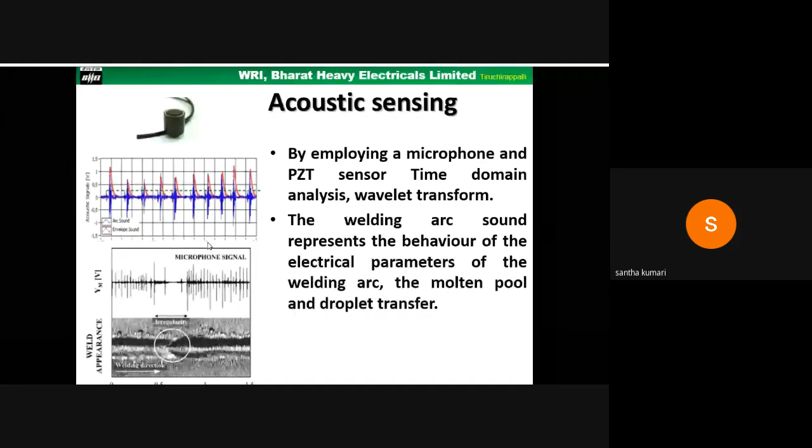For infrared sensing, electro-optic sensors are used to detect the signals, and the thermometer measures temperature by detecting the infrared energy emitted by materials which are at temperatures above absolute zero, that is, 0 degree Kelvin.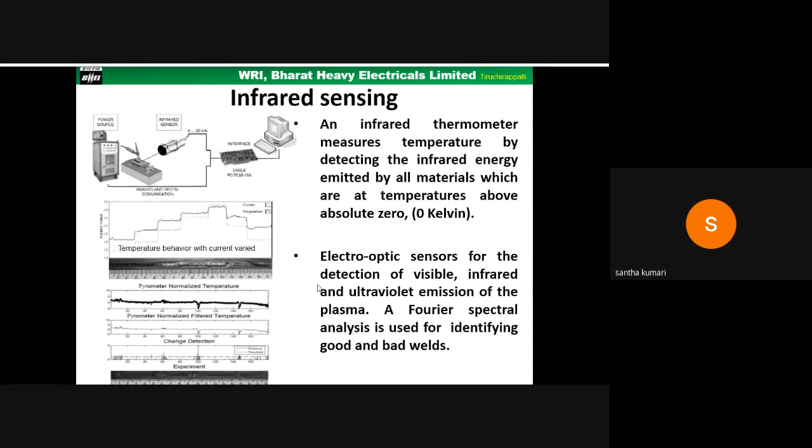The electrical impedance method is a similar method of capturing arc voltage. But here, by recognizing the patterns of these waveforms, the joining quality could be evaluated.

In order to understand the characteristics of all signals, the frequency domain has been used here. This graph shows the incidence of the number of defects that were calculated.

This is calculated per shift, over a longer number of days, per month, or per year. If you evaluate the process of defects in the welding shop, collected cumulatively, the number of defects like gas hole, burn through, and fusion-related defects are the major ones in the welding of tubular welding production in our boiler shops.

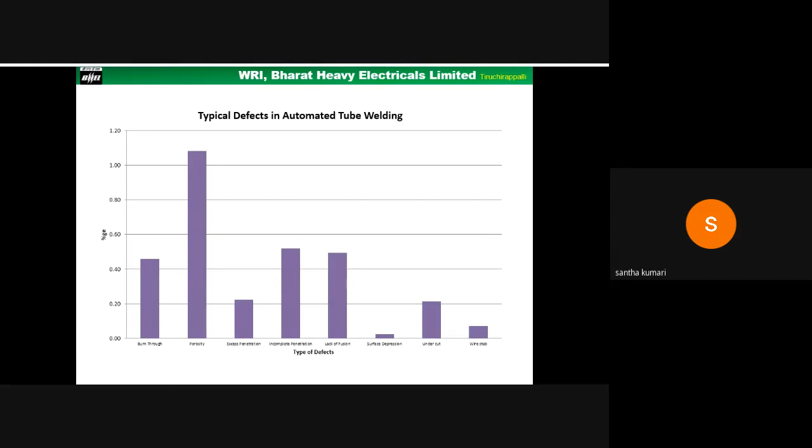We tried out these trials. We wanted to evaluate this with signature analysis and employ it for detection of defects. We started these trials.

For demonstrating this defect detection at WRI, some trials were tried out. The trials are conducted on a 12 mm thick carbon steel plate with a 70-degree included angle in a single V joint. The weld parameters were optimized with solid wire using argon CO2 shielding gas.

What is shown here is the top and bottom of the good weld achieved with the optimized parameters. The top and bottom views of the weld show a uniform bead with ripples and full penetration achieved.

Here we can see the undisturbed signal, the signals captured for voltage and current for this pulsed GMAW welding. In the undisturbed arc, we can see uniformity and cyclically repeating patterns of the signals obtained through this signature analysis signal capturing system.

In the PDD, we can also see three well-defined peaks with a smooth curve for a good weld. The current and voltage are recorded with respect to time in seconds. These values are cyclically repeated for undisturbed arcs.

These regions are reflected as three peaks in the PDDs of both current and voltage, corresponding to the three regions of the distribution of the values.

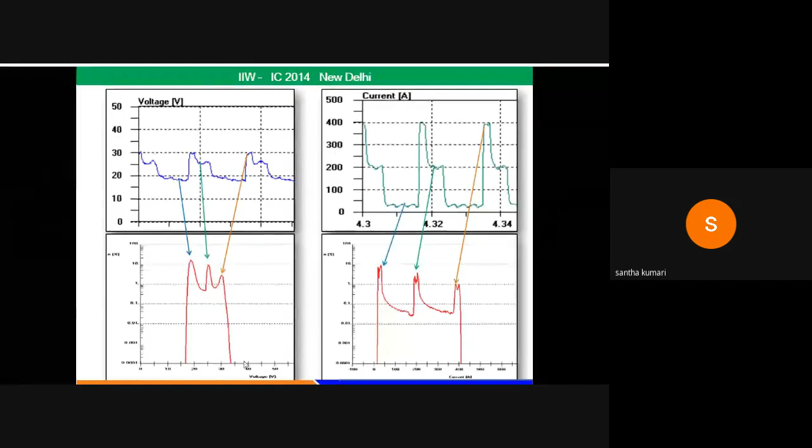The picture shows the relationship between the transient values of voltage and current, and the PDD is shown here.

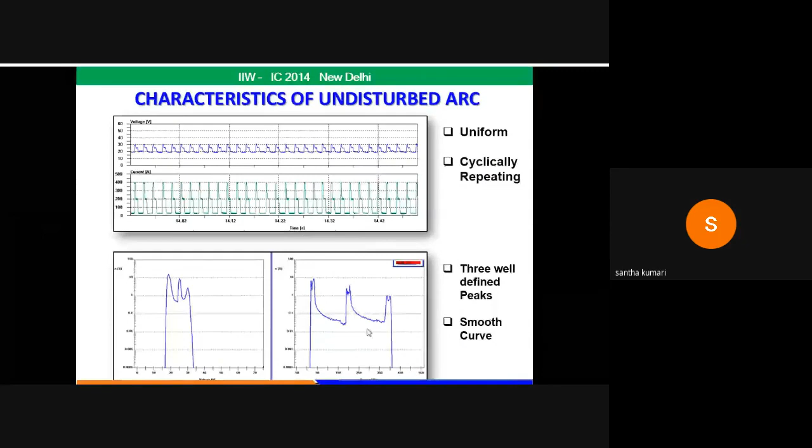Now we tried the burn through defect. I'm not showing that picture here since it took a lot of time, so I have to reduce the time. I'm just skipping the burn through defect detection here.

Experiments were actually conducted for burn through and porosities for studies. Here the signatures are obtained by inducing porosities due to atmospheric air, and the arc disturbance is shown here.

We induced porosity gas holes in the weldment by blowing the arc towards the weld pool area, by applying grease on the weld surface, or by reducing the shielding gas flow. With these three techniques, we induced the porosities.

The arc is paused for a duration of 5 seconds and closed, then for another 4 seconds to allow the welding arc to stabilize again, because we used a robotic station for doing these welds, to have a consistent weld. This process is repeated cyclically 4 times so as to create a disturbed signal and a stable phase in the arc, and similar discontinuities were created in the weld.

The transients of the segments with pores are shown below, showing the top of the pores. So here the PDD of this weld without defect and the weld with porosity is the signature obtained, shown here.

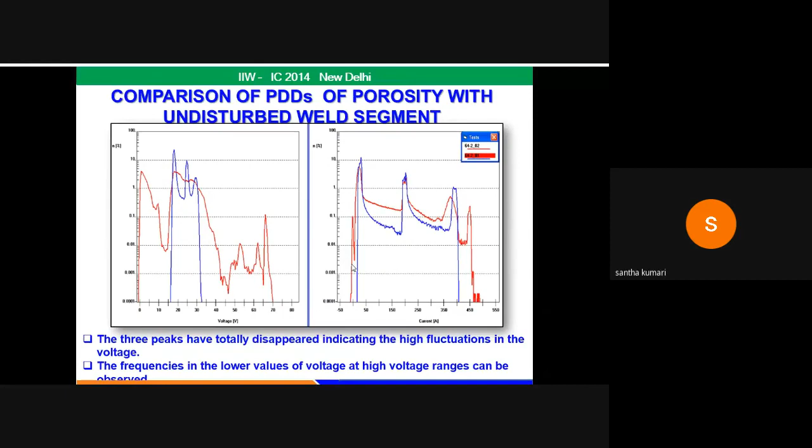I'll show you another example. In the second set of experiments on porosity, we controlled the shielding gas. We cut the shielding gas for about 6 seconds, allowed the shielding gas, and then for a few seconds we cut the shielding gas again for 3 seconds. That can also be seen exactly in the timeline of the transient.

So two porosities were created with this trial. The pores are shown here with the transient signals. When comparing the PDD of the porosity segment, it shows a lot of disturbances. Voltage PDD shows frequencies of lower and higher voltages, and current PDD also shows similar extra peaks below 0 amperes and around 450 amps.

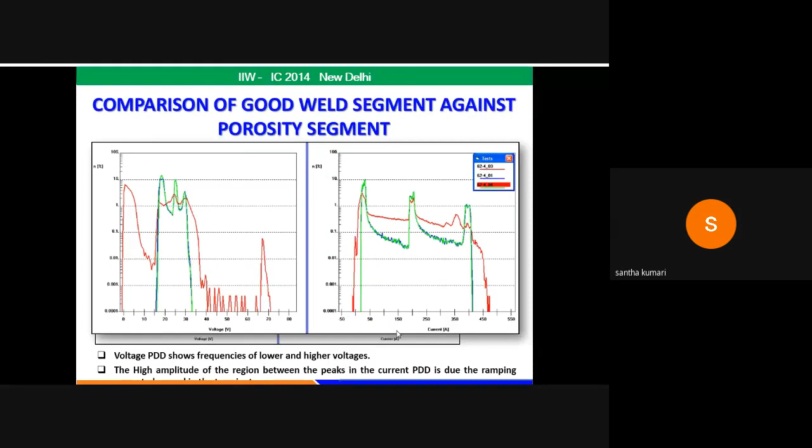The disturbed regions of pores created due to lack of shielding gas, contaminated surface, and airflow are comparable but have distinct characteristics. Therefore, from these sets of experiments, we could say that it is also possible to identify the defect along with its root cause by analyzing or comparing the voltage and current signals through signature analysis.

So I would like to conclude that the demand from industry has been ever increasing with the introduction of new materials and processes. Organizations have to be equipped with machines which not only yield to the growing demands but also meet existing and future needs. This is where digital technology plays a major role in making it simpler and integrating with new demands.

Today, welding machines are more flexible or modular in nature to perform the desired tasks, and the machines are provided with IIoT enabled software platforms. Yesterday Dr. Priyaji also mentioned this, because nowadays all the inverter-based welding power sources are provided with platforms with high speed bus. For example, Fronius machines like TransPuls Synergic, and CMT processes, including Kemppi and EWM machines, all these power sources are brought to factories along with platforms to enable the IIoT.

In the factory environment. So because of this, I would like to conclude that in the future this would be a necessity for welding industries, if we have to adapt this advancement in digital technologies. Otherwise we may miss the bus, like Nokia or Ambassador.